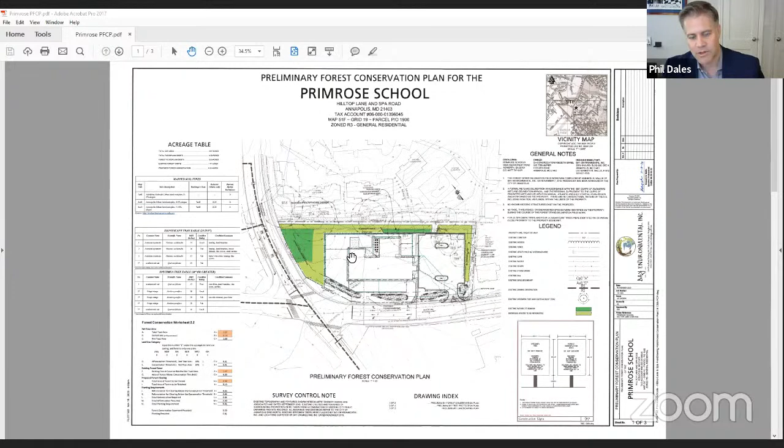With native vegetation. Annie, could I ask, as Ken talks here, could you highlight within the areas that are not shaded green, just with your cursor, the part where the tree line is, and show where the forest that we showed on our FSD is going to be cleared outside of these green shaded areas? I can see the tree line there in the white, but if we could just trace that through the building area and the parking lot so folks can see where we are going to have to impact.

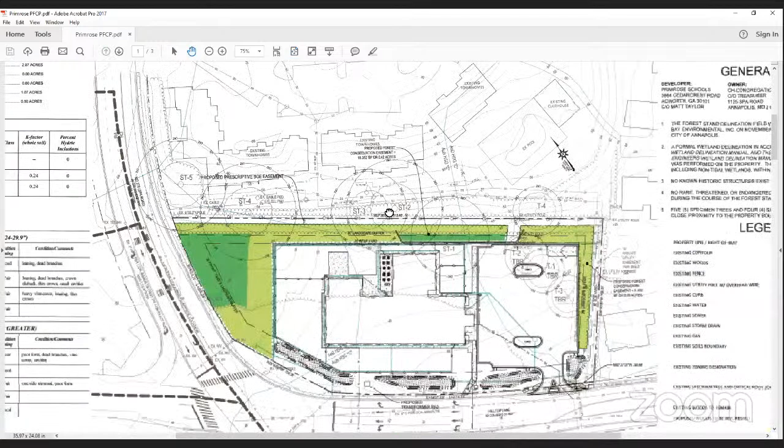So starting over here, this is the playground area. This is the tree line coming through the building and the parking lot. It's hard to see here, I can zoom in. It kind of wraps into this corner, and so this whole side is forested as well. And then it comes back around there. That's part of what Mr. Smith alluded to, the two-step process here.

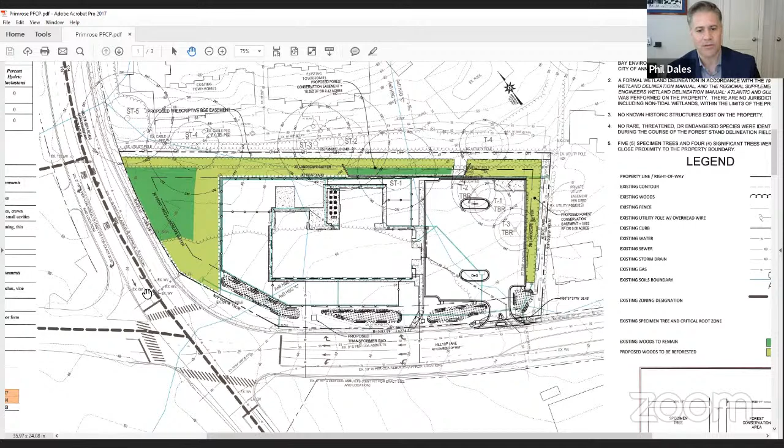We delineated forest on site, and it was ranked in terms of the quality of the forest, which was not high due in large part to what Mr. Wallis mentioned, the invasive species throughout the forest, in the two forest stands that we delineated. The second step is what Mr. Wallis is presenting now, the forest conservation plan, which involves retention and replanting of the outline. Now I'll give it back over to Annie, Ms. Luttrell, and Mr. Wallis.

In addition to the removal of the forest, there are three trees on the right-hand side in the back corner of the parking lot that will also be removed. They're not specimens, but they are larger than 24 inches. Two of them are in fair condition, one is in good condition. But due to the access point where it has to be, as required by DPW, it's just not possible to save those trees, though we tried to avoid most of the critical root zones. Plus, two of those trees are in fair condition at best.

The stormwater management is proposed up front along the road. You can see the facilities up there.

I think there's one specimen tree, specimen tree number 1, in the back here that is right up along the LOD. The city of Annapolis Forester has been out there and agrees that tree needs to come down. It's in poor condition, not in good shape, poor form, with many cavities. So that tree will need to be removed as well.

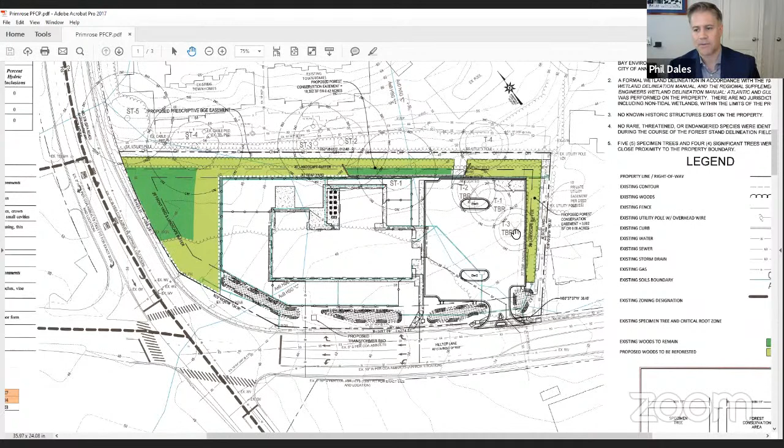Ken, I'm not sure if you're ready to pass it over to Deb, but if you've got more, I certainly didn't mean to cut you off. Yeah, no, not at all. No, I think we can pass it over to Deb. She can explain a little bit more on the planting plan for this property. Pass it over to you.

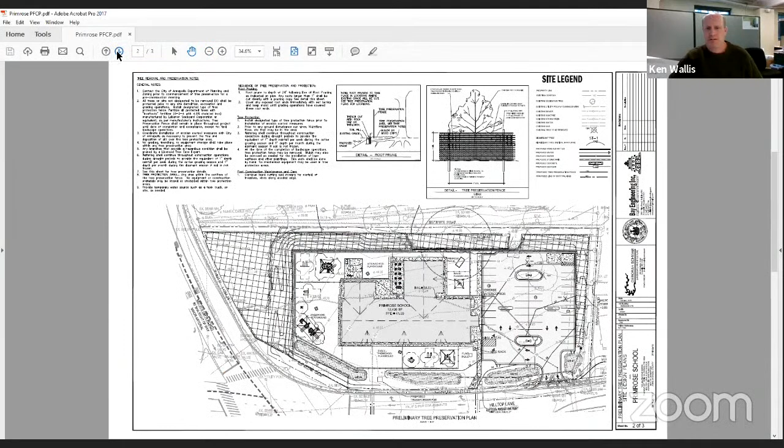Right now the reforestation shown on a preliminary landscape plan has not been finalized, but we've met or exceeded the planting requirements. We have 86 reforestation trees at 1 to 1.5 inch being shown in the areas to be reforested. If specimen tree number 1 also comes out, we'll be planting that area when we do final plans. As I said, we're leaving that root zone clear of new plantings now.

The caveat we deal with in planting is that with those rear overhead lines, we have to use smaller species that will be approved by BG&E to be within the horizontal distance of those overhead lines. So the larger trees are planted closer to the fence line of the playground area, which works out well anyway, because they will grow and shade the playground.

To the west side of the playground area, that's also all canopy trees, but also some evergreens to provide a little more screening between the play area and Spa Road that is there. On the east side, there's a line of trees that are reforestation, but will also provide shade to the parking area. That will wrap the corner and match the side where the overhead lines are there too.

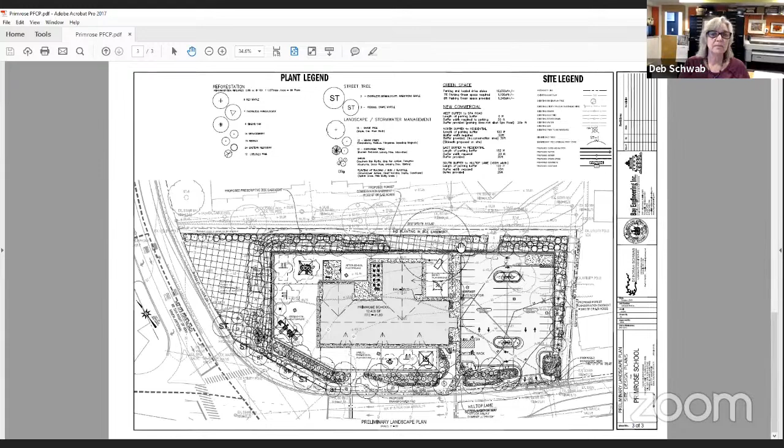Great. So anyone in the public who's watching, especially anyone in the adjacent residential area to the north, that area that's blank now, we'll be revising and adding replanting there. Okay, well, thank you both, Deb and Ken. I think that's it for our presentation.